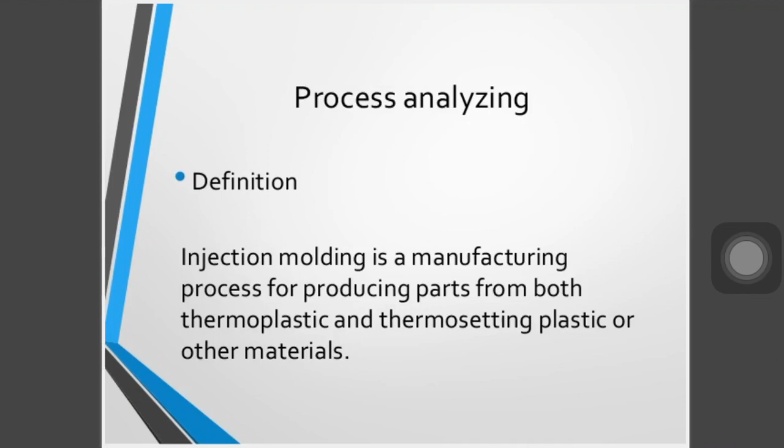It is used when the components are to be made from plastics, rubber, glass, etc. Usually the mold is made from metal such as steel or aluminum.

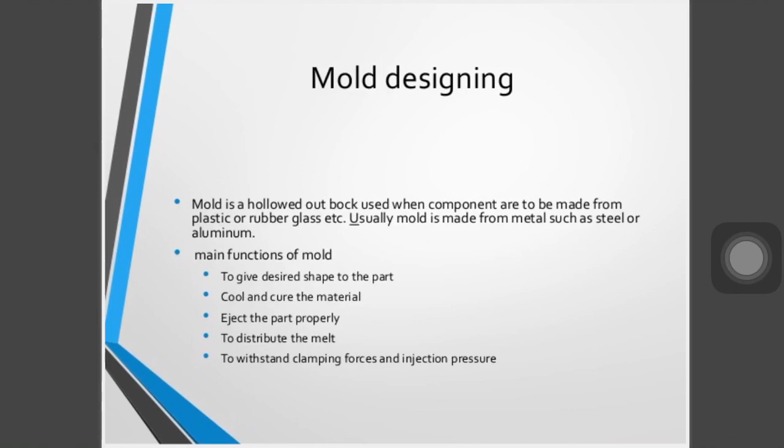The types of plastic used here are of both types: thermoplastics and thermosetting plastics.

Thermoplastics are plastics that do not undergo chemical changes.

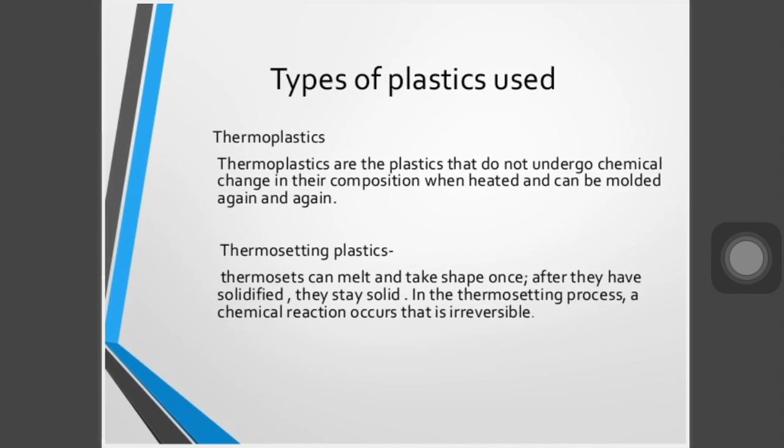So what basically happens in the injection molding process is that the raw material of the plastic product is inserted into the hopper chamber, where it is heated, and that heated plastic becomes softer due to the process of the heaters. When we apply some kind of pressure with hydraulic fluids or a ram, it is compressed towards the mold, and the mold has a certain kind of opening which is required in the desired shape.

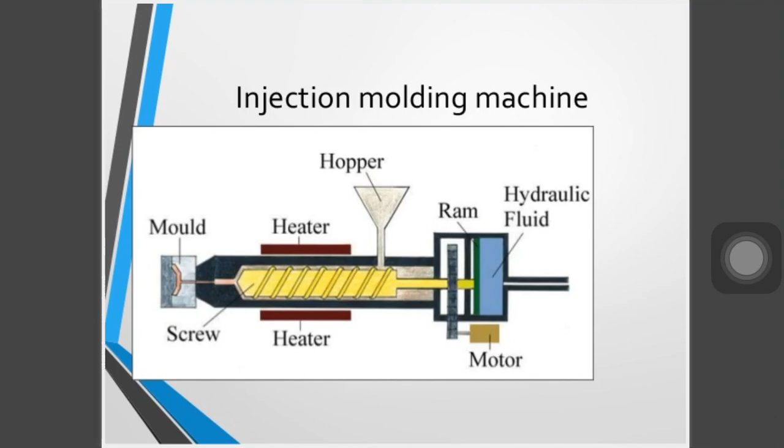When we apply a certain force, the soft plastic material is converted into shapes. The main component in this process is the hopper - the thermoplastic material is supplied in the form of small pellets. Gravity feeds it into the barrel and screw assembly. Next is the barrel, which is the container below.

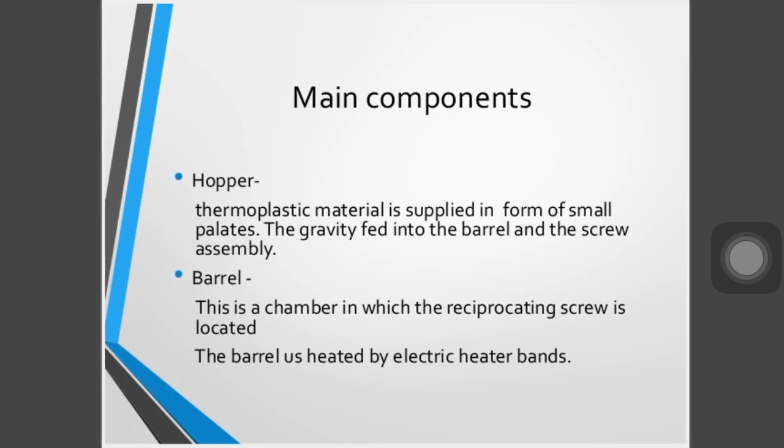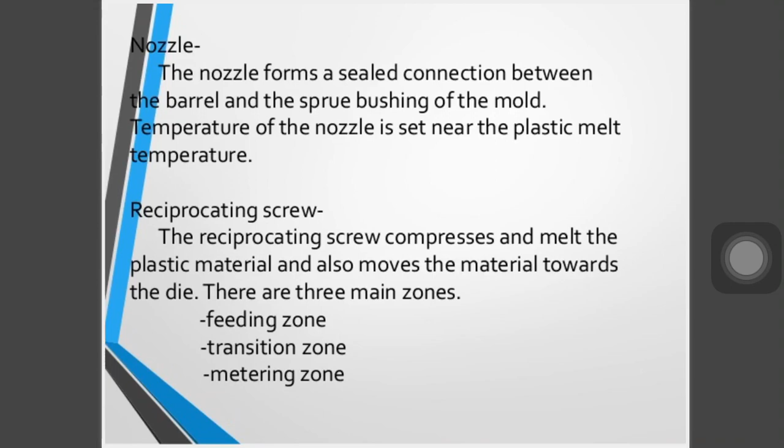This is the chamber in which the reciprocating screw is located, and the barrel is heated by electric heater bands. Third is the nozzle, which forms a sealed connection between the barrel and the sprue bushing of the mold. The nozzle temperature is set near the plastic melt temperature. The reciprocating screw compresses and melts the plastic material, moving it toward the die. There are three main zones: the feeding zone, transition zone, and metering zone.

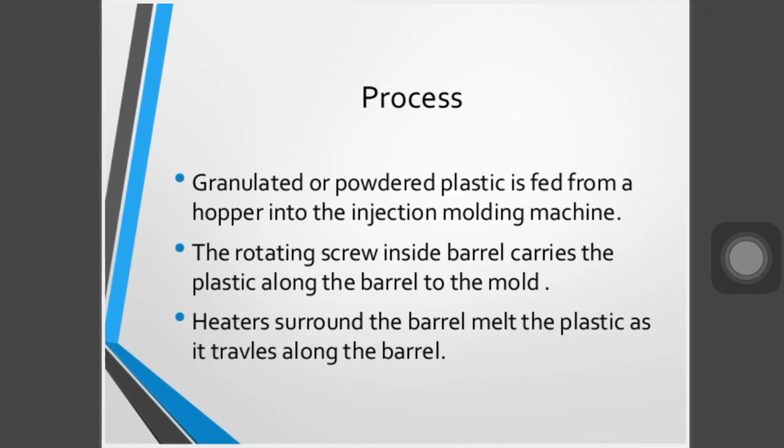So what happens in the injection molding process? Plastic powder is fed from the hopper into the injection molding machine. The rotating screw inside the barrel carries the plastic along the barrel to the mold. The heater surrounding the barrel melts the plastic as it travels along the barrel. The screw is forced back as the melted plastic collects at the end of the barrel.

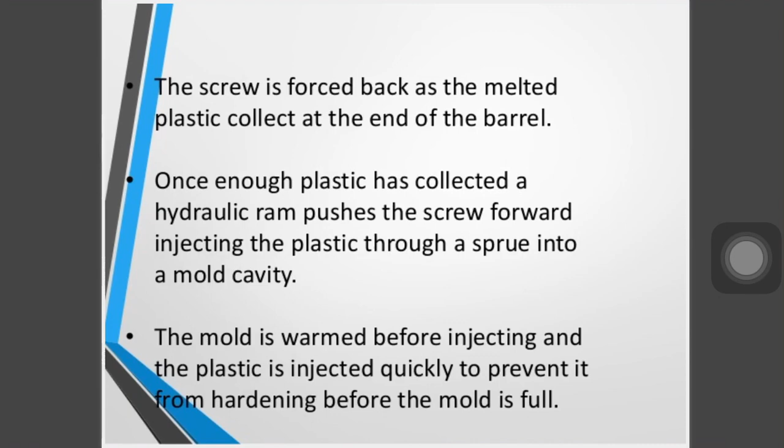Once the plastic has collected, a hydraulic ram pushes the screw forward, injecting the plastic through a sprue into the mold cavity. The mold is warmed before injecting. The plastic is injected quickly to prevent it from hardening before the mold is full. Pressure is maintained for a short period to prevent the material from creeping back during setting, which is the hardening process. This prevents shrinkage and hollowness, giving a better quality product.

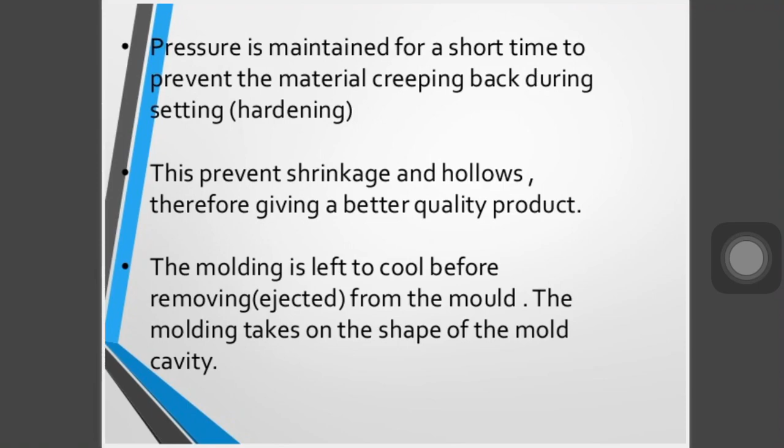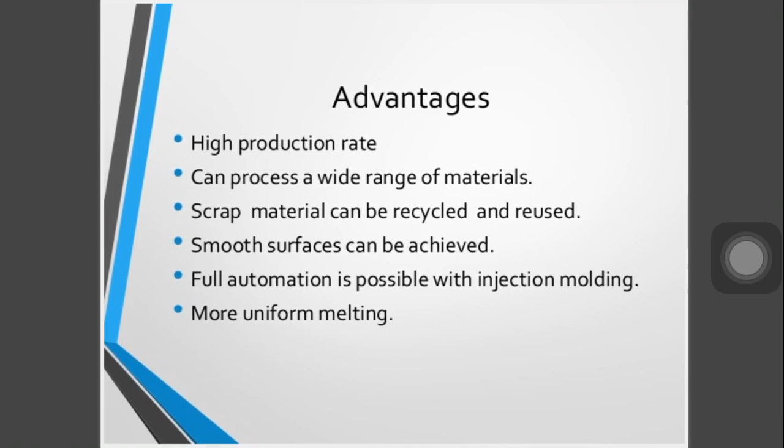Now, what are the advantages of this injection molding process? We can achieve a high rate of production, process a wide range of materials, scrap materials can be recycled and reused, a smooth surface can be achieved, full automation is possible with injection molding, and there is more uniform melting of materials.

Now, what are the disadvantages of this process? There is a high initial investment required in injection molding equipment. There is a high startup and running cost required. Contamination of raw material affects the quality of the final product - if there is any contamination in your raw material, right, then it affects the final product of your plastics.

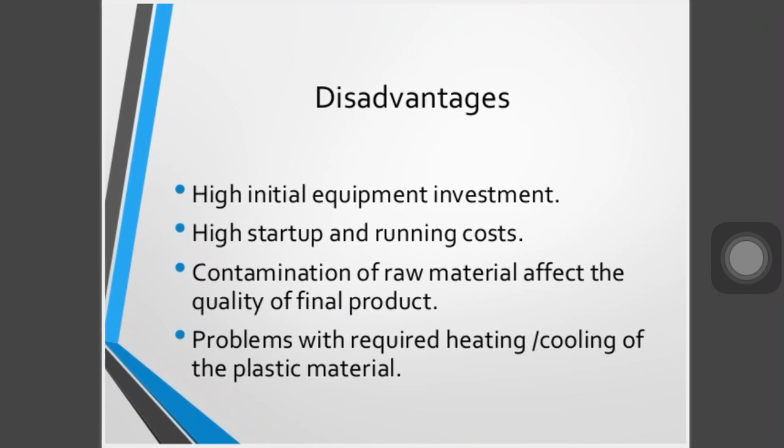Now, what are the applications of this process? In the applications, we can manufacture automotive components, cable assemblies, computer electronics components, medical and dental products, toys and hobbies. We can also manufacture beverage plates. Laboratory equipment is also manufactured with the help of the injection molding process.

Now, the second process of today's lecture, which is the extrusion process.

Extrusion molding process के अंदर क्या होता है? The extrusion molding is the process to make parts of a continuous length and uniform cross sections, जैसे पानी की पाइप, ड्रेनेज की पाइप, जिनकी लेंथ बहुत बड़ी है और यूनिफॉर्म क्रॉस सेक्शन चाहिए, उसके लिए एक्सट्रूजन मोल्डिंग बहुत ही यूजफुल प्रोसेस है.

A characteristic that differentiates extruded from injected molded plastic is the viscosity of the plastics at the normal processing temperature. The extruded plastics often have a higher melt viscosity, इसके अंदर melt viscosity बहुत ज़्यादा होती है, which allows the extrudate to retain the shape imparted to it by the die while the extrudate is in the quenching stage.

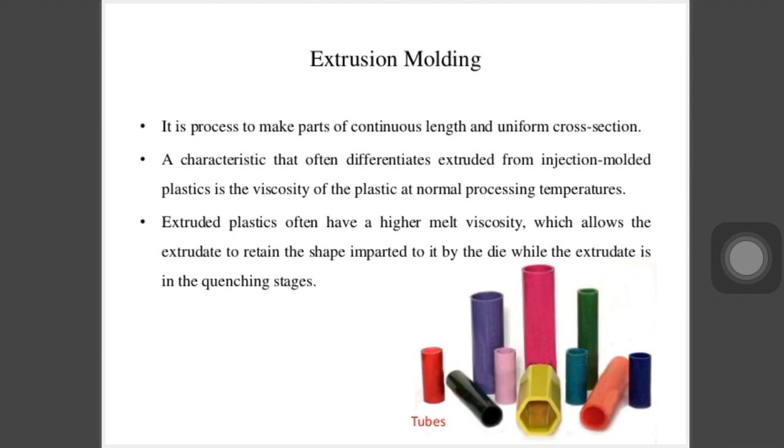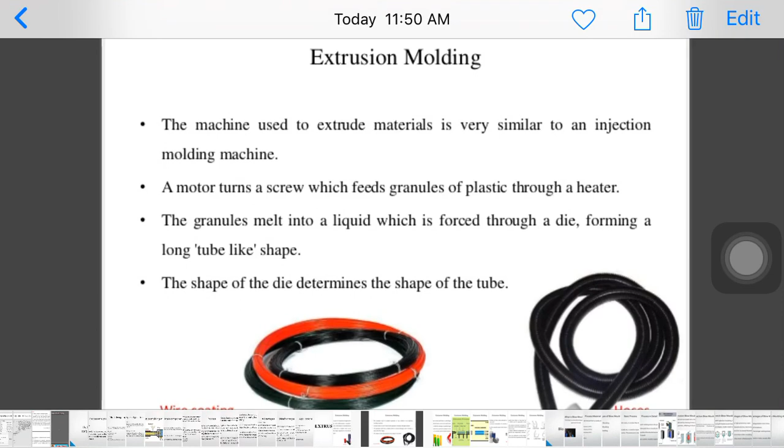Extrusion molding - the machine used to extrude materials is very similar to an injection molding machine, ये injection molding से काफ़ी similar है. A motor turns the screw which feeds the granules of plastic through the heaters. The granules melt into the liquid.

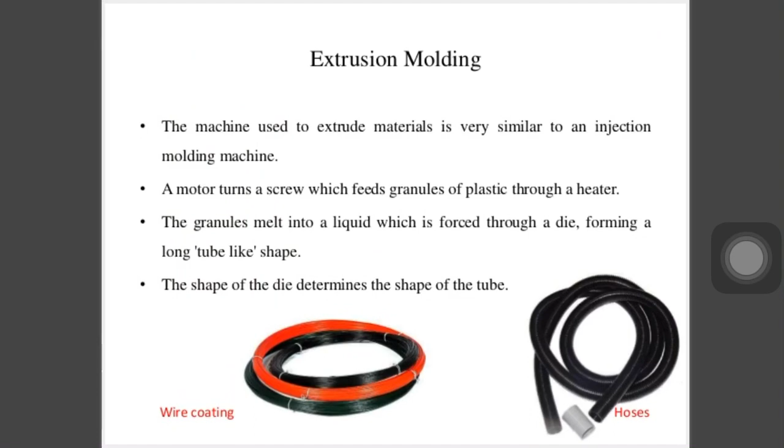which is forced through the die, forming a long tube like the pipes. The shape of the die determines the shape of the tube. वो तो उसके जैसा ही है, जैसा शेप आपके डाई के अंदर है, उस तरीके का शेप आपके प्रोडक्ट को मिलेगा.

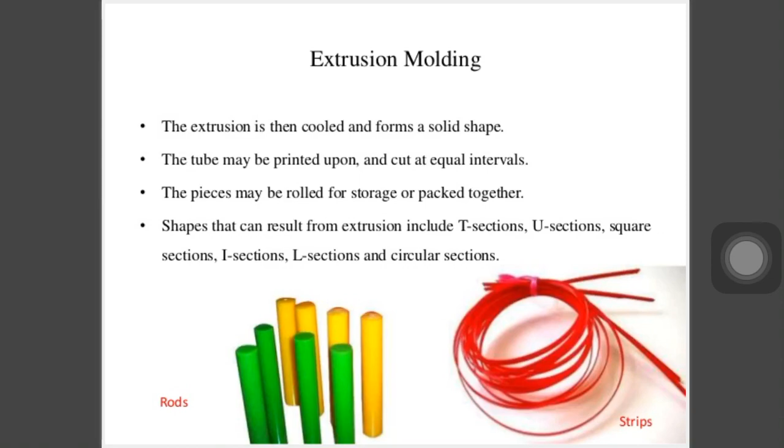The shapes that can result from the extrusion include the T section, U section, square section, L section, or the circular sections - we can manufacture these with the help of the extrusion molding process. Here you can observe the process figure of the extrusion molding.

When we insert the raw plastic pellets into the hoppers, they go into a kind of container which has a screw rotating under the barrel, and we externally apply heat. Due to that heat, the extruded product forms when the ram is inserted towards the mold direction, and we achieve the extruded parts towards the end of the product.

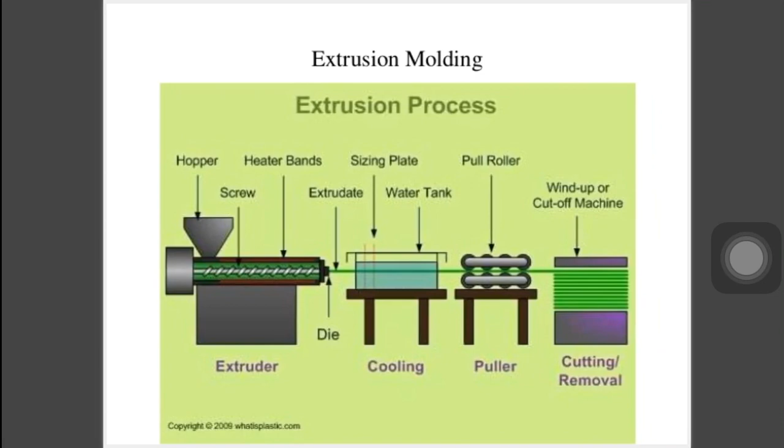Once it is cooled, it becomes a solid, and it passes through the pull rollers where we can extrude it, or pull it, and at the required length we cut it, and get the exact size of the plastic product. So these are the figures of the extrusion molding process, right?

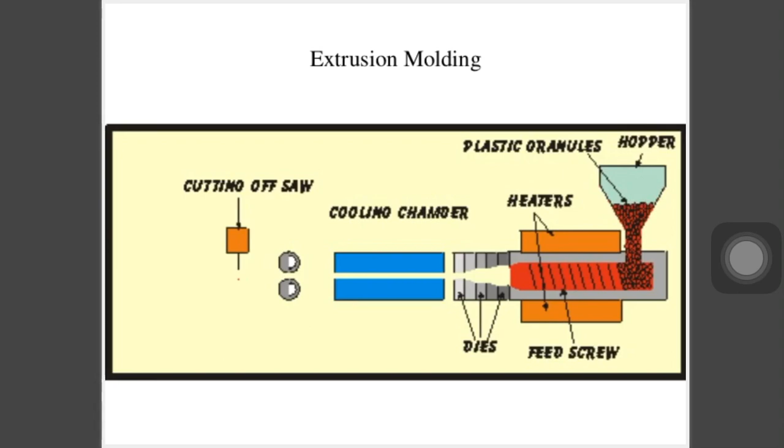ये फिगर भी काफ़ी सिंपल फिगर है. प्रोसेस वाइज जो है वो ज़्यादा डिफरेंसेस नहीं है एक्सट्रूजन मोल्डिंग और इंजेक्शन मोल्डिंग प्रोसेस के अंदर. The extrusion molding process has a screw extruder working on the same principle as the ordinary domestic mincing machines. A plastic extruder essentially consists of a barrel or cylinder fitted with the screw.

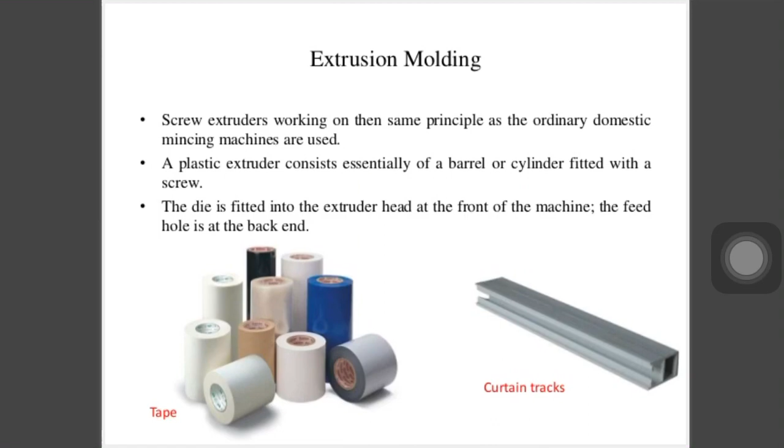The die is fitted into the extruder head at the front of the machine. The feed hole is at the back end. The screw extruder usually has 3 or 4 heat zones along the length of the barrel, each of which can be separately controlled at a predetermined temperature. The heating is affected by means of electric resistance heaters on the barrel and the nozzle, or by passing steam or hot oil through ports built into the machine. Electric heating is most usual.

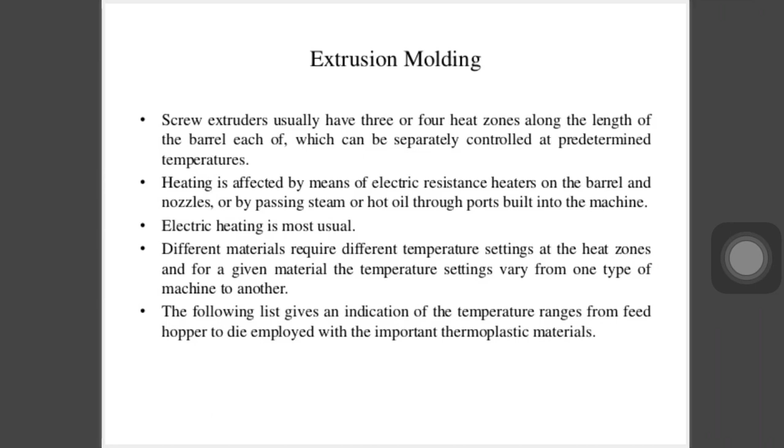Different materials require different temperatures for setting at the heat zones, and for a given material the temperature setting varies from one type of machine to another. The following list gives an indication of the temperature range from feed hopper to die employed with important thermoplastic materials. So these are the products manufactured - different kinds of sections manufactured with the help of the extrusion molding process.

Now the next process of our today's lecture is the blow molding process. Let's discuss the blow molding process. What is happening in the blow molding process? So what is blow molding?

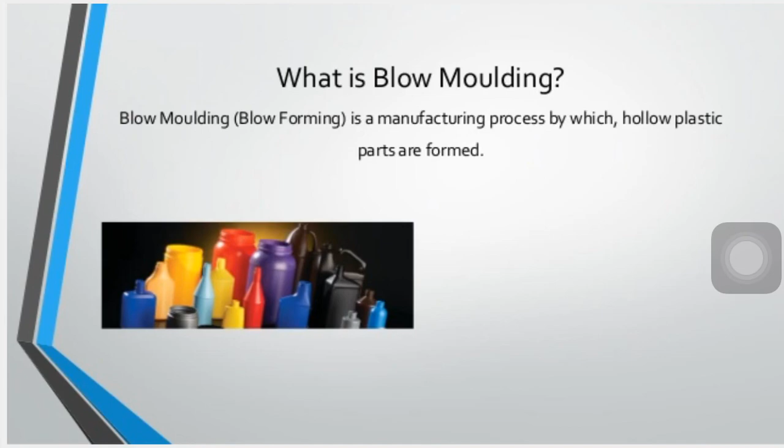Blow molding or blow forming is a manufacturing process by which a hollow plastic part is to be formed. This is a manufacturing process by which we can manufacture hollow plastic parts. Now which are the process materials?

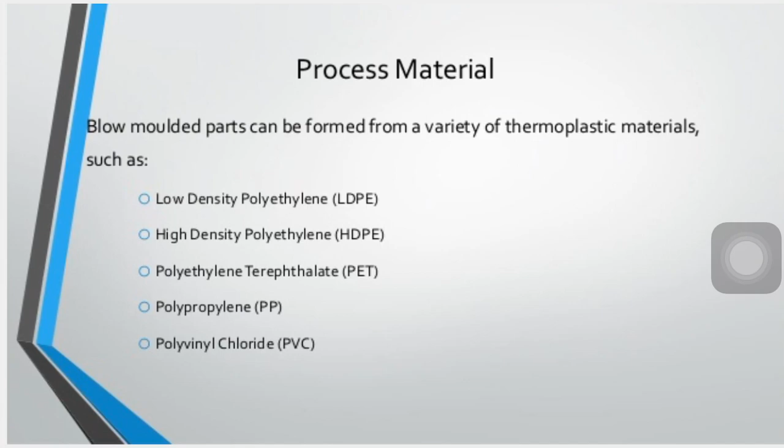The blow molded parts can be formed from a variety of thermoplastic materials such as low density polyethylene (LDPE), high density polyethylene (HDPE), polyethylene terephthalate (PET), polypropylene (PP), and polyvinyl chloride (PVC). Using these types of plastics, using thermoplastics, we can make blow molded products.

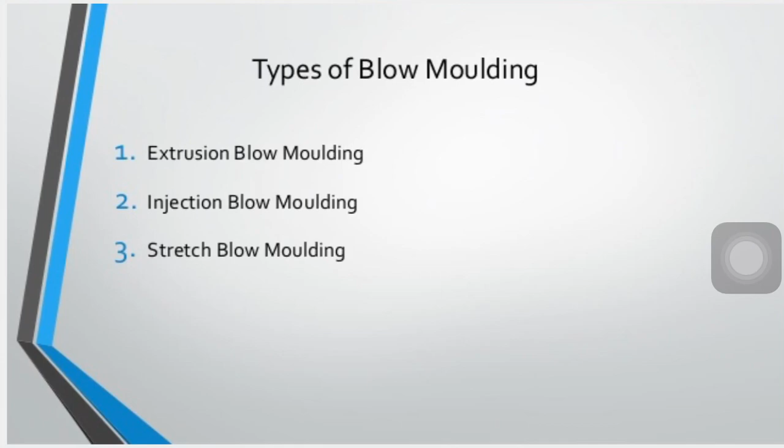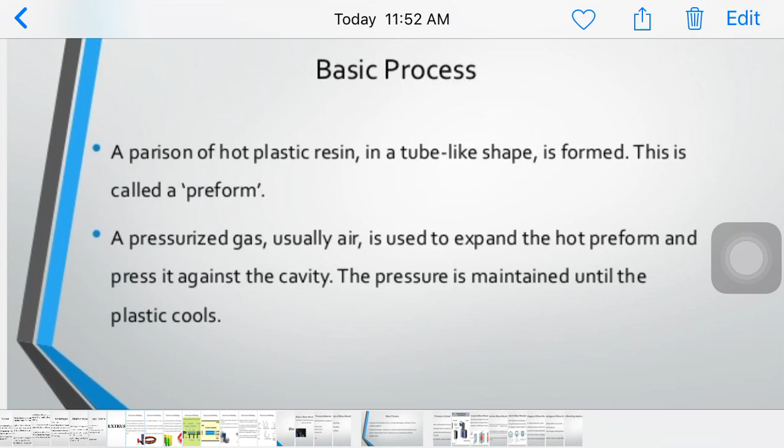There are 3 types of blow molding process: extrusion blow molding, injection blow molding, and stretch blow molding. The basic process in blow molding is that a parison of hot plastic resins in a tube-like shape are formed.

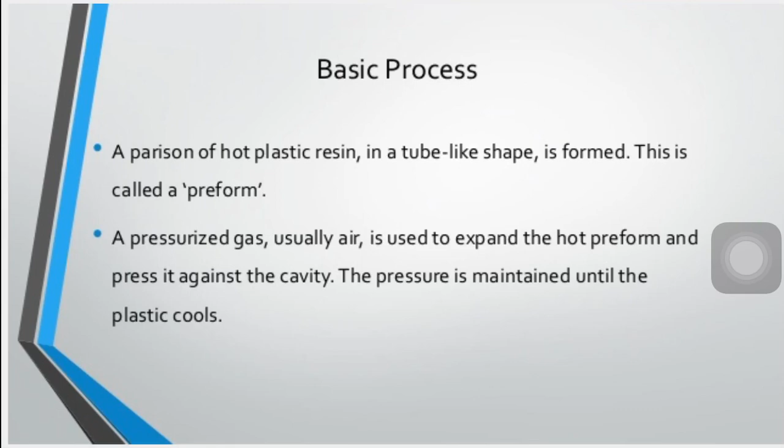This is called a preform, or a parison, of hot plastic resins in a tube-like shape. A pressurized gas, usually air, is used to expand the hot preform and press it against the cavity. The pressure is maintained until the plastic is to be cooled.

Now what are the process details? The process begins with melting down the polymers into the parisons. The parison is then clamped into the mold and the air is to be pumped.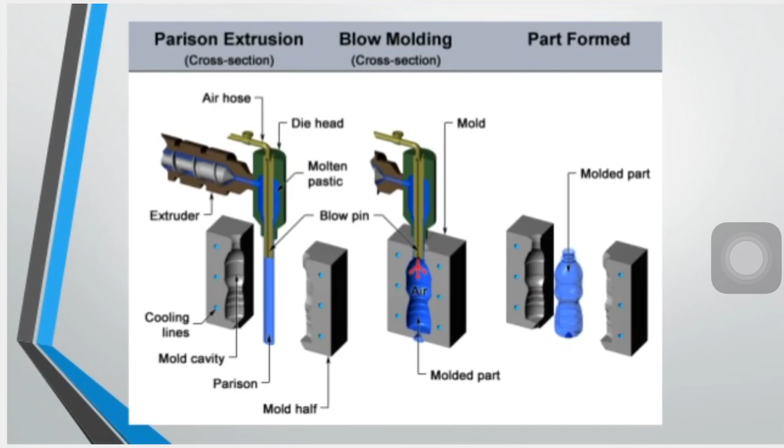तो जैसे ही एक एक्सटेंट लेवल पे जाएगा तो एक टाइम के बाद प्रेशर के बाद पूरा मोल्ड के अंदर प्लास्टिक फील हो जाएगा। जैसे वो ठंडा हो जाएगा तो हम लोग उसको मोल्ड से बाहर निकाल के इजेक्ट करेंगे। अब आपके पास पानी की बोतल का पार्ट रेडी है। नाउ एक्सट्रूजन ब्लो मोल्डिंग प्रोसेस।

In extrusion blow molding process, a plastic is melted and extruded into the hollow tube. This parison is then captured by closing it into a cooled metal mold. Air is then blown, जैसे हम लोग फुग्गा फुलाते हैं उसी तरीके से हमें करना है, into the parisons, inflating it into the shape of the hollow containers or the parts.

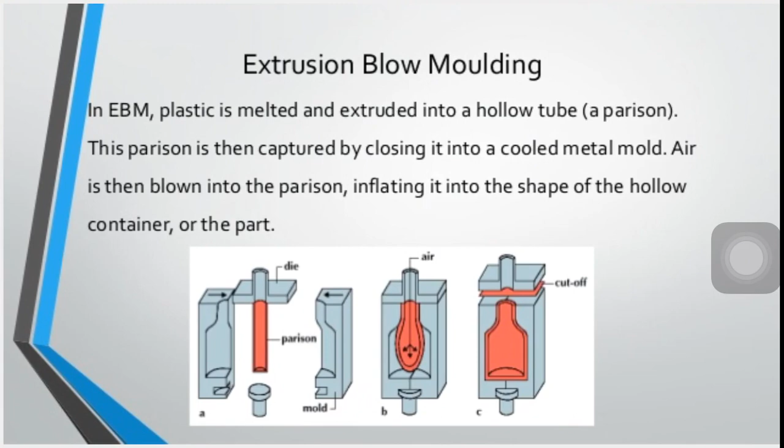Now the second, which is the injections blow molding. In injection stage, a molten polymer is injected into the heated preform mold. The preform consists of a fully formed neck with a thick tube of polymer attached. Then the blowing stage, अगर स्टेज की मैं बात करूँ, the preform is passed to the hollow and cooled blow molds.

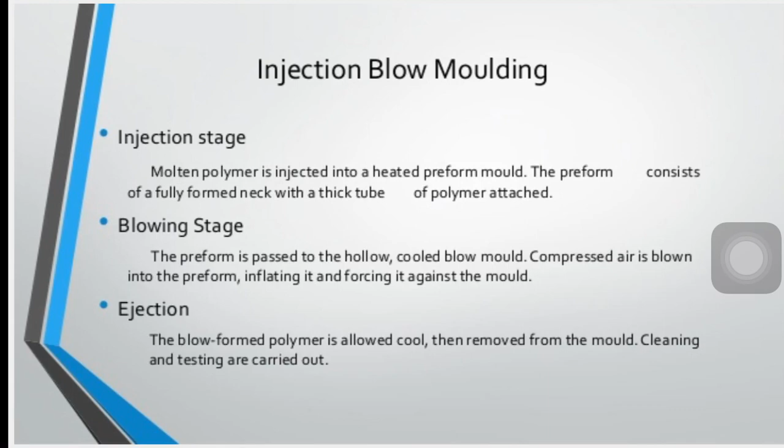The compressed air is blown into the preforms, inflating it and forcing it against the mold. Now the third stage, which is ejection. The blow formed polymer is allowed to cool, then removed from the mold, and cleaning and testing is carried out. Now the last, which is the stretch blow molding.

अब यहाँ पे खींचना है। The preform is first made with the injection molding. In SBM, the stretch blow molding process, the preform is heated using the IR heaters, यानी infrared heaters, and then blown using the high pressure air into the various shapes inside the metal mold।

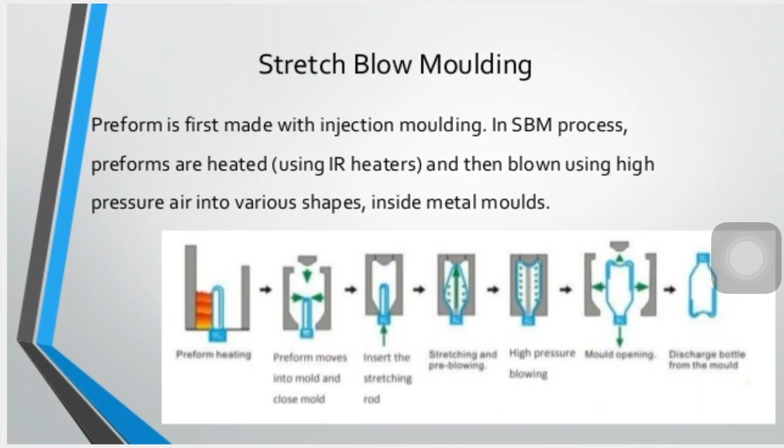तो इस तरीके से वो बॉटल आपको मिल जाएगी। Now what are the advantages of the blow molding process? It is well suited for low or high production rate. The mold costs are comparatively low due to the lower pressures, a quick product revision for increased flexibility.

The tooling is less expensive than the other molding processes. The price per part is less than in the rotational molding. So these are the advantages of the blow molding process.

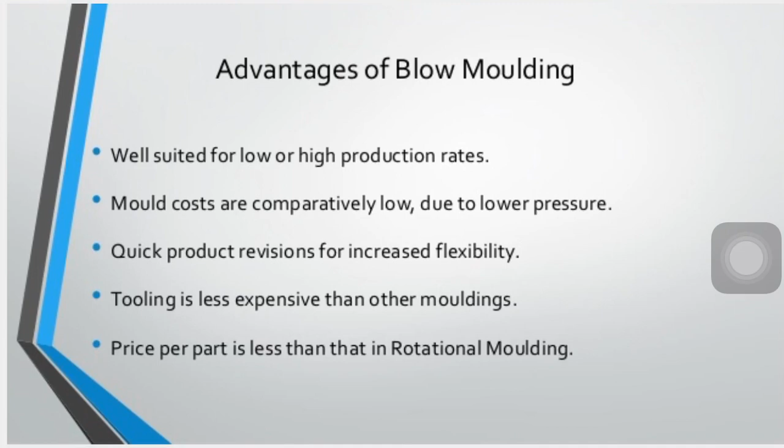Now what are the disadvantages of the blow molding process? The products are not biodegradable most of the times, यानी आप बार बार इस प्लास्टिक को यूज़ करके उससे बना नहीं सकते। So these are the advantages and disadvantages.

Then the process and material limitations. The extrusion molding has a longer cooling time than the injection molding। Cooling time जो है वो ज़्यादा लगता है।

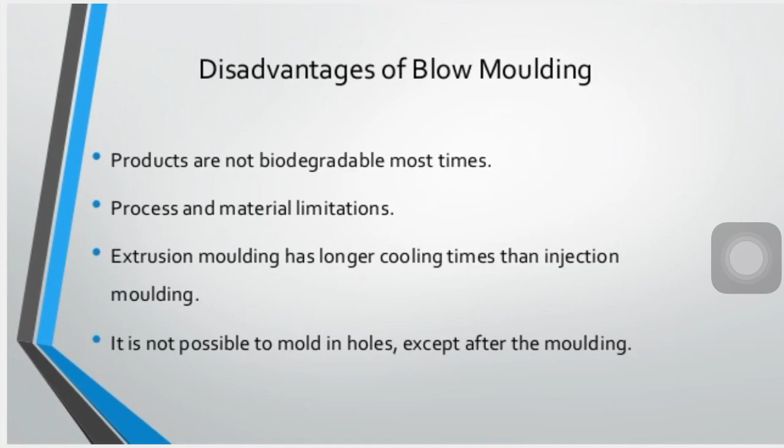It is not possible to mold a hole। यानी आपको अगर कोई होल मोल्ड करना है तो वो पॉसिबल नहीं है, एक्सेप्ट आफ्टर द मोल्डिंग। वो मोल्डिंग हो जाने के बाद आप कर सकते हो, साथ में ऐसा करना पॉसिबल नहीं है क्योंकि जो एक ही गैप है वहाँ से हम लोग ब्लो द एयर करने वाले हैं, इसलिए ये पॉसिबल नहीं है।

नाउ व्हाट आर द एप्लीकेशंस? We can manufacture the milk bottles, pharmaceutical bottles, anti-freeze bottles, then the garbage cans, drums, fuel tanks, and the ice chests and coolers जो है वो हम लोग ब्लो मोल्डिंग प्रोसेस से बना सकते हैं। So this is all about the three different molding processes।

The first, which is the injection molding, we will discuss in this lecture. The second, which is the extrusion molding, and the third, which is the blow molding process, which is discussed in this lecture.